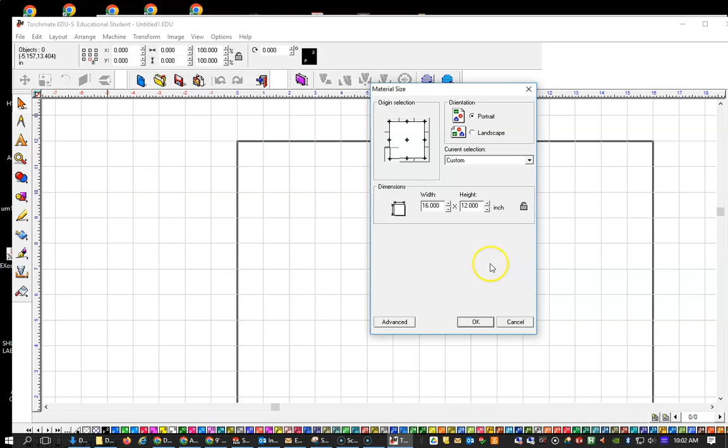Okay, all right, I would think I was about to do material setup. So under layout here, you can go to material size. We can set this to anything we want. 16 by 12 is fine. Notice that the origin is down in the lower left-hand corner, and that's really the most important piece of this. So we're going to hit OK, as long as it's big enough to handle our part.

We're going to go to File and go to Import, and we are going to go to our folder in the tech drive and find that file, that DXF file that we saved from Onshape.

And there it is. And just like when we were in Illustrator, whoops, here we go. I'm going to just click and hit OK.

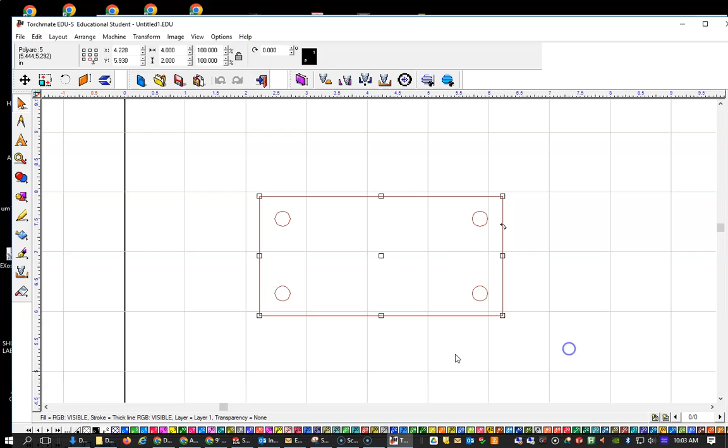And just like when we're in Illustrator, we need to join these things because it may come in, well, it looks like it's all together, but just to be on the safe side, I like to go to Arrange and go to Connect Path. All right, that makes it all one item.

And then go to Arrange and, whoops, we need to select it again. Go to Arrange and Make Path.

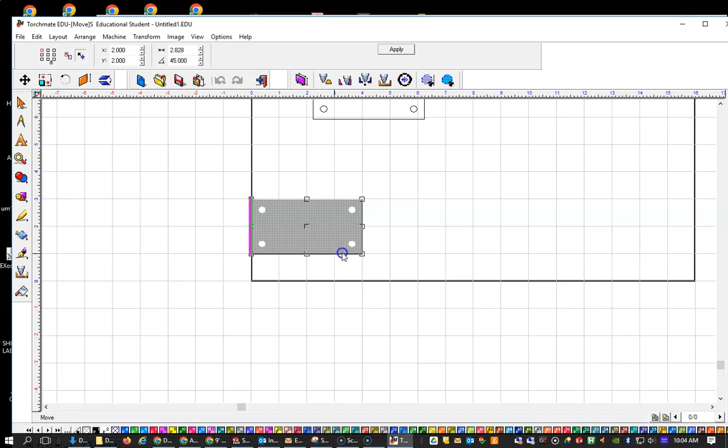All right, I'm going to put it in the lower left-hand corner here, because that's where I want it, and again, you can use the arrow keys just like in Illustrator. So when I zero out my material on the plasma cutter, I don't want to waste a lot of material, so I'm going to put this pretty close to the edge.

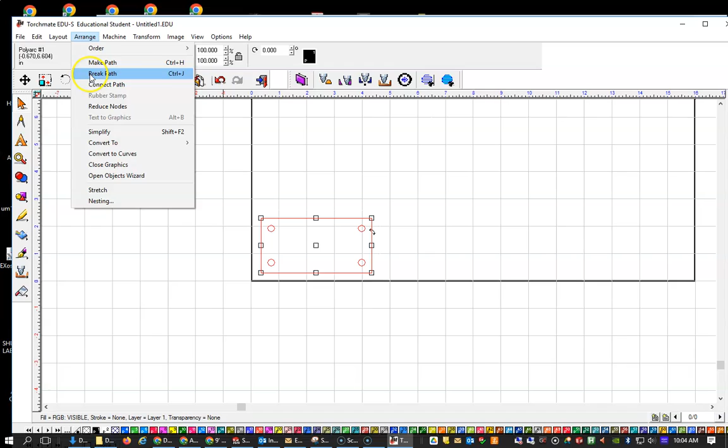All right, I don't want the holes here, so I'm going to go to Arrange and Break Path for a moment, and I'm going to select these holes and delete them because the plasma cutter doesn't do a good job with small holes. Forgot to do that, so I just broke the path there. Now we can go back there and go to Arrange and Make Path again.

Now we're going to create our actual tool path. So we're going to select all this. We're going to go to Machine, Create Tool Path, Male.

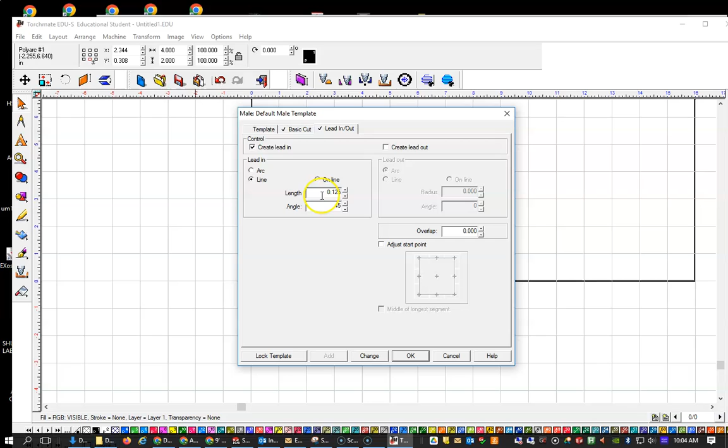Then you're going to go to View and you're going to go to Show Tool Paths Only, and you should end up with this line right here. All right, so we should be good to go. Show Tool Paths Only. There we go.

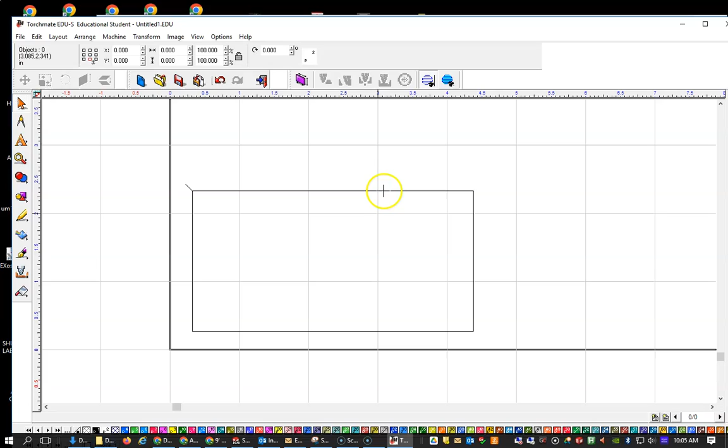All right, and we're going to hit Save. So File, Save As, put it in your folder. And we can call it the same thing because it's a different file type. And this one's good to go for the plasma cutter.